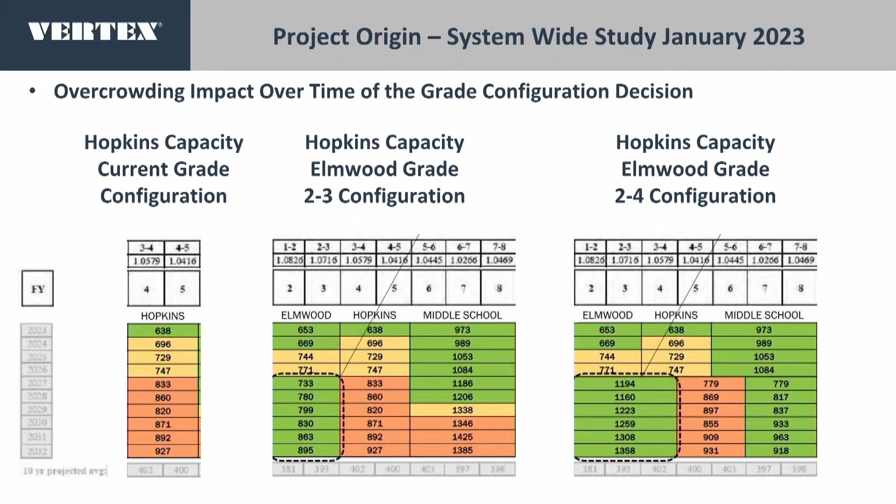So we wanted to talk about where we are now, currently in the project. Currently, we're about to begin the permitting process, so we'll be going before the Conservation Commission as well as before the Planning Board in the coming month.

We're also completing construction documents. We passed the 60% construction document milestone today, and we'll be estimating once again the project with the hope of having updated and possibly lower numbers at the end of the month prior to town meeting.

We're also in the process of beginning a pre-construction phase, and where the pre-construction phase is valuable is it gives us the opportunity to understand the site a little better, do a little work that we plan to do during the April vacation week, so that we can better understand some of the unknowns and better inform what needs to go into the project. And sometimes that can also have a cost impact as well.

Up until this point, we've been working on the previous approval of design funding, and the town voted to approve $3 million for that design funding last year. And this is, we're further moving towards completing that design.

As part of that, we're going to go before town meeting in early May, and then the ballot, hopefully a few weeks later, and that's going to be when we propose the construction funding. So when we talk about the upcoming ballot vote, that ballot vote is really to complete the remainder of the necessary funding so that we can continue through construction.

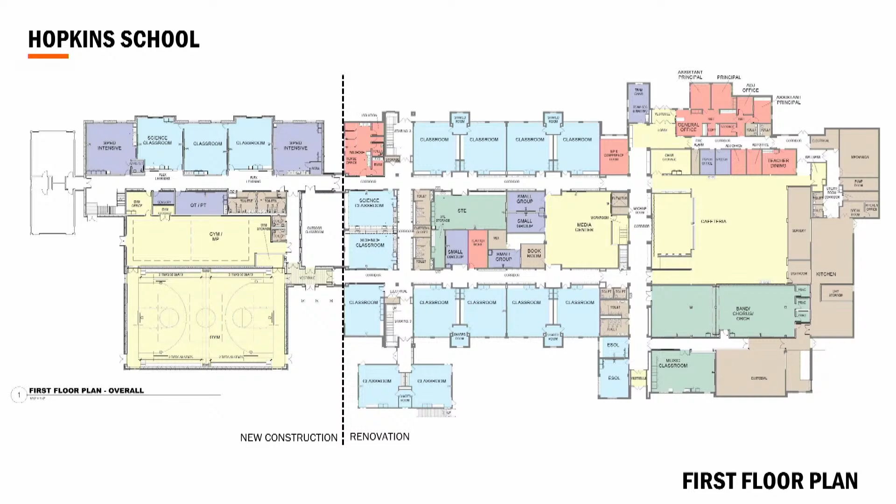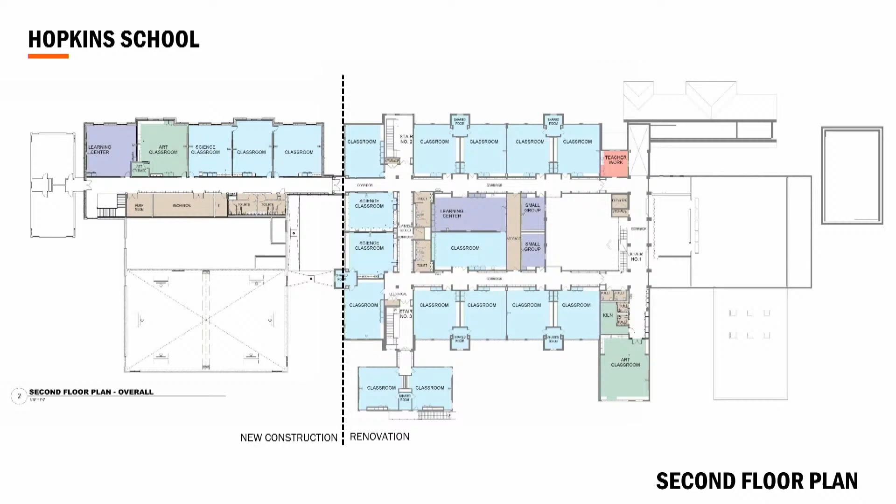We previously on the forum, in the first forum, spoke to a lot of the interior spaces and showed interior renderings. So if you're interested in seeing that, you might go back and watch that meeting.

One of the things we've heard during the process is, why can't we just add more modulars? That's a valid question, but the way the building is designed now, the addition is separated from the existing building by a firewall, meaning there are actually now 2 buildings from a building code perspective on the site. So there's the original building built in the late 90s, and then the proposed addition, which is substantially separated.

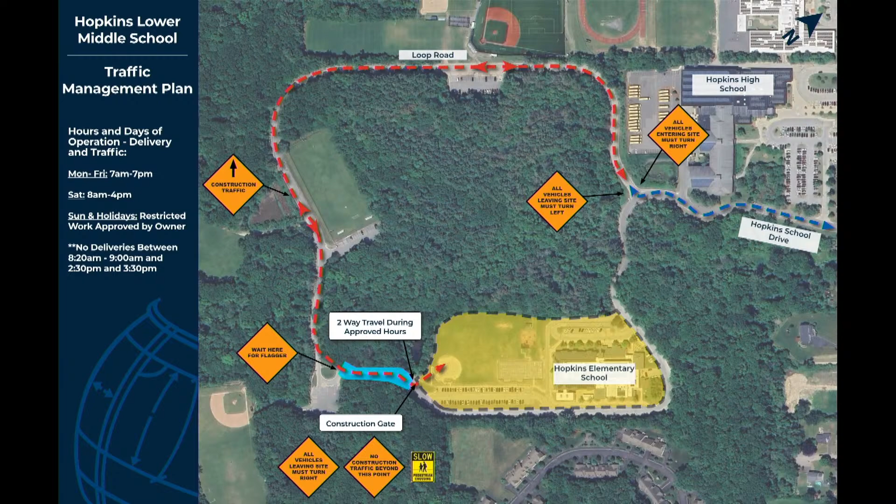In this slide you'll see what we just discussed—the traffic through Loop Road, how we created our construction access onto the site. We've installed construction fencing and established a traffic pattern for phase 1. As we go through all these phases, our primary goal is to maintain a safe school zone throughout the entire project.

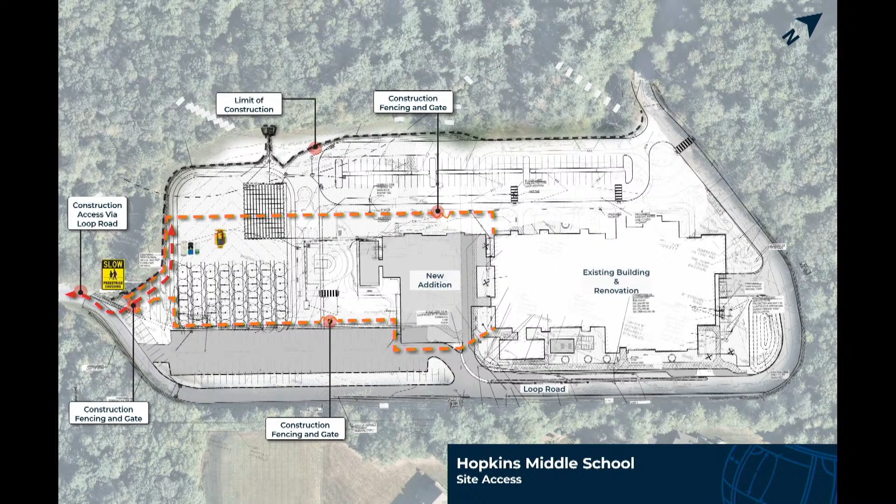We moved on to phase 1, starting this summer and running through June of 2025. This phase is some enabling work over the summer and the start of the addition construction. Our first step in the enabling work is to install paving and create a safe play area for the students, and to expand the parent pickup and drop-off area north of the building—that paving area is the graded-in area just center top of the building.

As part of doing an occupied renovation, we're maximizing the use of each section of the site so that we can ensure we're maintaining the necessary number of parking spaces, maintaining opportunities for the kids to have recess areas, and maintaining access to areas where they can continue to have PE outside, all while trying to effectively and efficiently build a fairly large addition and manage the fairly complex site changes.

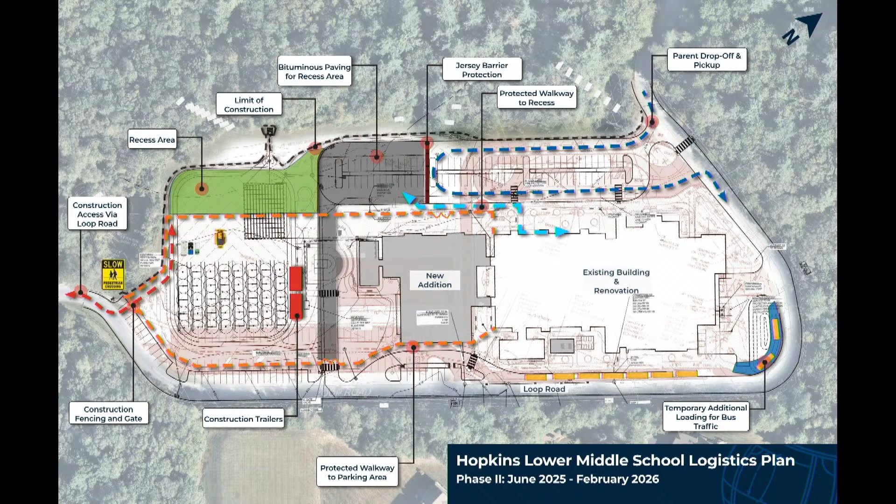We haven't shown it on any of our screens up here, but I think it's important that everybody understands our general working hours are 7 to 3:30 p.m., so we won't be causing any disruptions to the afternoon sports or activities.

So now we've moved on to phase 2 in this slide, June of 2025 to February of 2026. We're continuing our addition work and reworking the south parking area. The logistics for construction, the recess areas, and the parent drop-off remain essentially the same, and that's kind of our goal throughout the project.

We really want to minimize any changes or disruptions for the students and faculty. We want to have their paths set up and maintain that as long as we can. During the summer of 2025, we'll rework that lot in Loop Road south of the building, and this creates some additional parking and again keeps the bus route safely away from the construction site.

So now we've moved on to phase 3 in this slide, and we're almost there. I hope everybody's happy, our job's done. The new addition is complete, it's occupied, and people are in there. The parking lots and the drop-off area are fully operational.

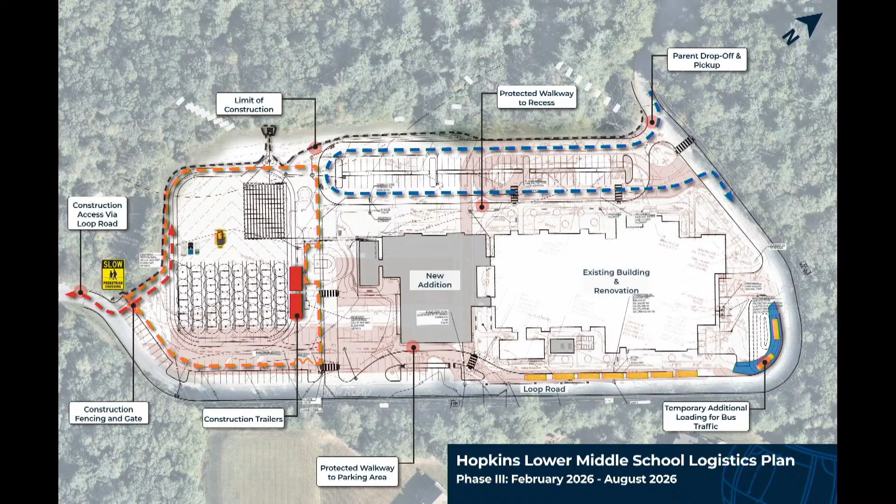Our construction really just is focused on that isolated area to the left of the building, west of the building, on some play fields. I touched quickly on exterior work through all these slides. Ricky's going to go into a little more detail now on some of the interior work.

Yeah, so as far as the interior work goes, there's going to be really two major phases associated with that. The first one being the construction of that new addition. At that point, we're going to really leave the existing building alone almost entirely, aside from the summer time frames.

Where we'll be doing some light construction. But our goal is really to have no disruptions to the school activities at that point while we are constructing that addition, from September to February 2026.

Really, the second major phase of the interior work is going to be when we turn over that addition space for the school's use, and then go into some of the more major interior renovations like the cafeteria and some of those science classrooms, as well as the remaining light renovation work that we didn't get to that first summer.

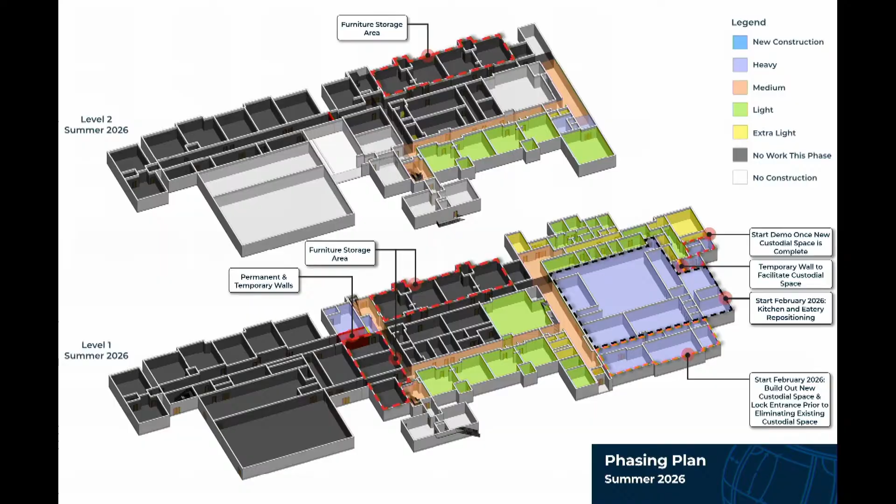And what the cost of the Hopkins project means in relationship to other cost issues. We've talked at length in the Elmwood process about how there was fairly steady construction inflation right up until the start of the pandemic. And the pandemic really showed a boom in incremental, significant incremental steps that drastically upturned that inflation over the last few years.

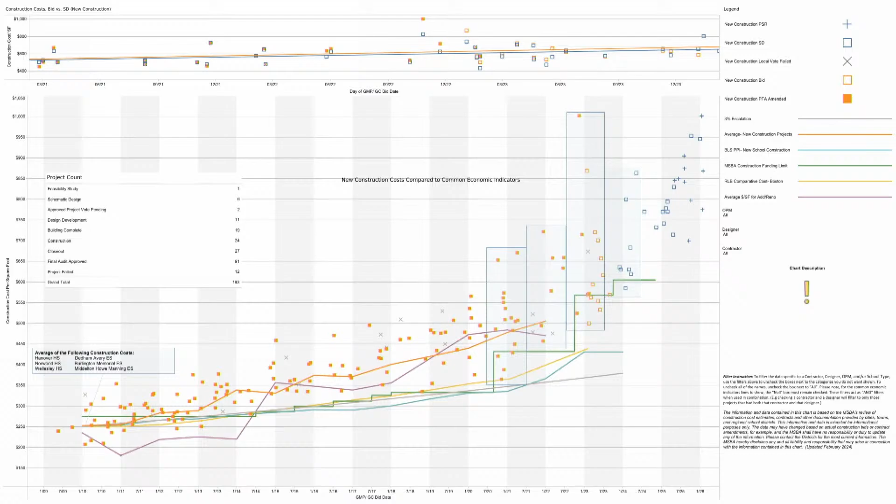In an effort to address the question raised at the last forum, we compared a lot of the projects that are out to bid—there are 8 of them—over the next 11 months, from July 2024, when we expect initial pricing on Hopkins, all the way to June of '25, when Elmwood will be bid to a general contractor.

There's a remarkable consistency amongst a lot of this pricing. Overall, it averages $758 a square foot.

Hopkins is a $400 per square foot total project. I say that using the MSBA's method of establishing construction dollars per square foot—taking the total construction budget divided by the square footage of the building. That includes both addition and renovation, and site work.

To provide a comparison to new construction pricing, we looked at the breakout price associated with just the addition, as well as some of the site work. We can't put all the site work in the addition number, because the addition only makes up 26% of the total project. So for the most accurate comparison, we took the $713 a square foot for the building itself and added in 26% of that site work cost.

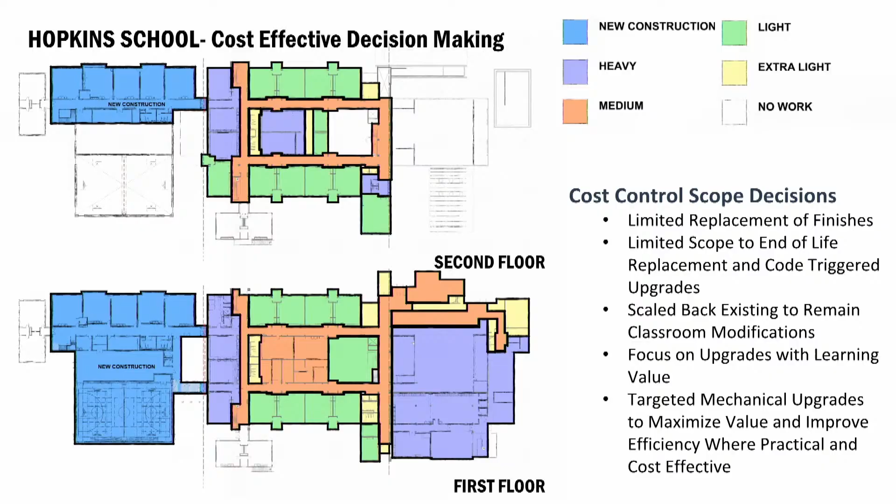Now, we recognize that the price at design development is more than the price that was presented at schematic design. And there's a number of reasons for that.

As the design developed, it was identified that a larger stormwater recharge system was necessary, and we're continuing to look at opportunities to find the most efficient power service and generator service to the new addition and the existing building. Some of the added HVAC upgrades increased the electrical load, which prompted some of those changes.

We identified a code trigger that requires a full fire alarm replacement, and we identified that in order to most efficiently prepare the school for the arrival of students in the fall, there were certain enabling costs that were much more efficient and less impactful if we did them as part of the summer.

We have some items we're still reviewing, like whether we have adequate floor prep in the renovation and whether we have adequate moisture mitigation for the new flooring that's going to be installed. We also know that there's some ledge that exists in the building, so we have some allowances currently within the number for that, but we also have a plan to study that further so we can understand the true impact and ways that we can plan around that.

There's some additional acoustic treatments that needed to be added, and there were additional project requirements—winter conditions, temp labor, and safety—that were added to the project as we settled on logistics for how we would move the project forward, working with Commodore. We're also looking at builder's risk insurance and ensuring that we have an accurate cost for that.